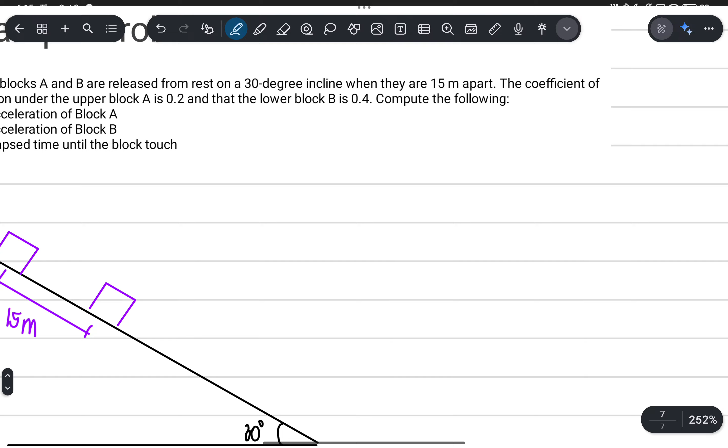Kasi kanina, okay, next. 2 blocks, A and B, are released. Ayoko na, relapse pala, ako rin nag-relapse. And from rest on a 30-degree incline, when they are 15 meters apart, the coefficient of friction under the upper block A, mu A, is 0.2, and then the lower block B, 0.4. Compute the following: acceleration of block A, acceleration of block B, and the elapsed time until the blocks touch.

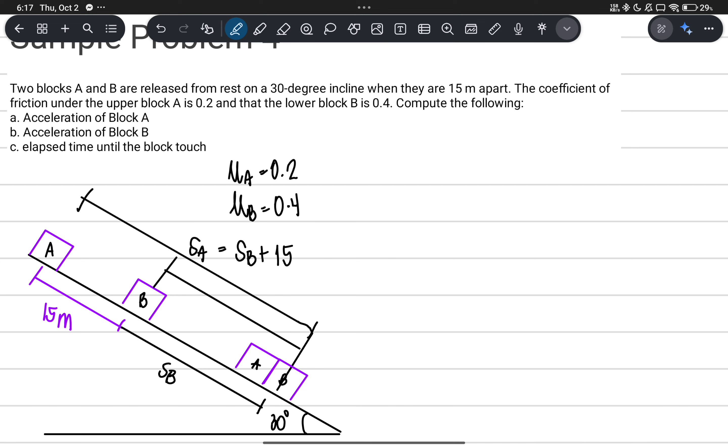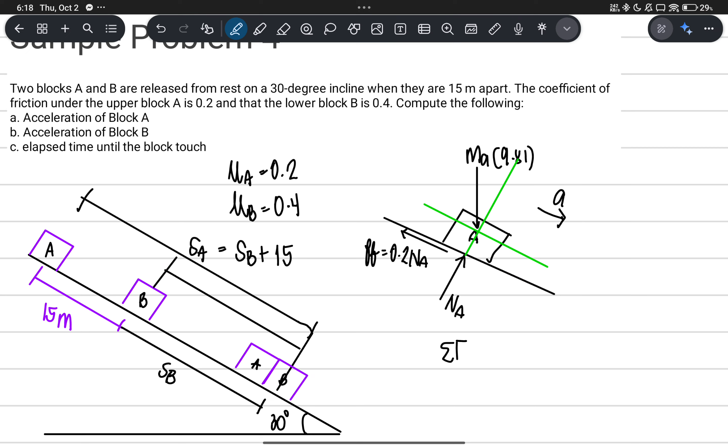So, punta muna tayo kay block A, kasi may acceleration siya. I-drawing natin yung free body diagram. This is block A. Normal force NA, acceleration downward along the incline, weight MA times 9.81 since no mass given, and friction force upward, FF = 0.2 NA. Rotate the axis. Summation of forces along Y prime equals 0: NA minus MA times 9.81 cosine 30 equals 0, therefore NA equals 9.81 MA cosine 30.

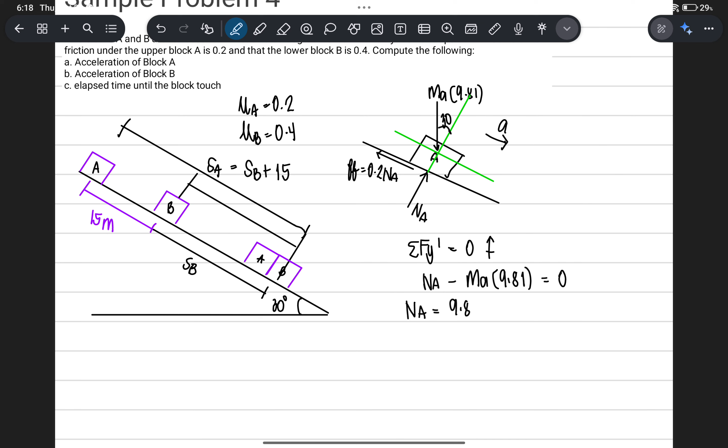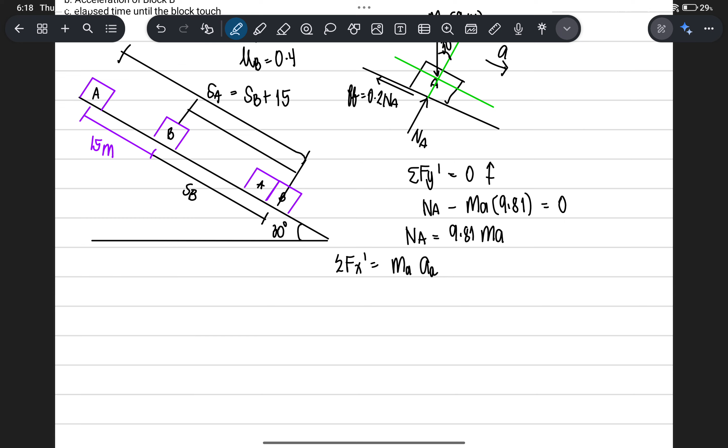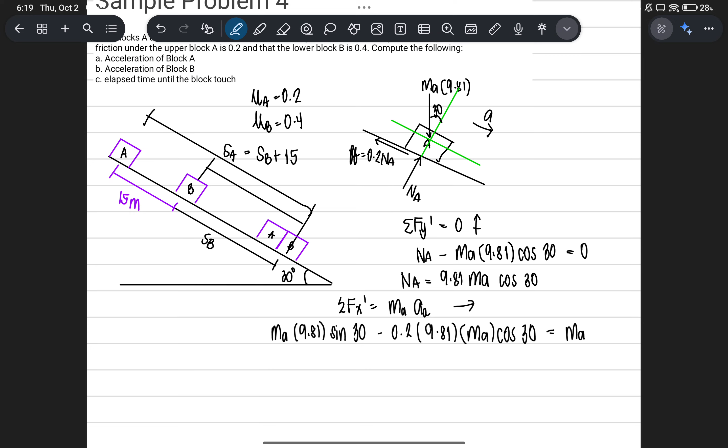Summation of forces along x prime equals MA. MA times 9.81 sine 30 minus 0.2 times 9.81 MA cosine 30 equals MA times acceleration of A. Divide both sides by MA, so MA cancels. Acceleration of A is 3.20.

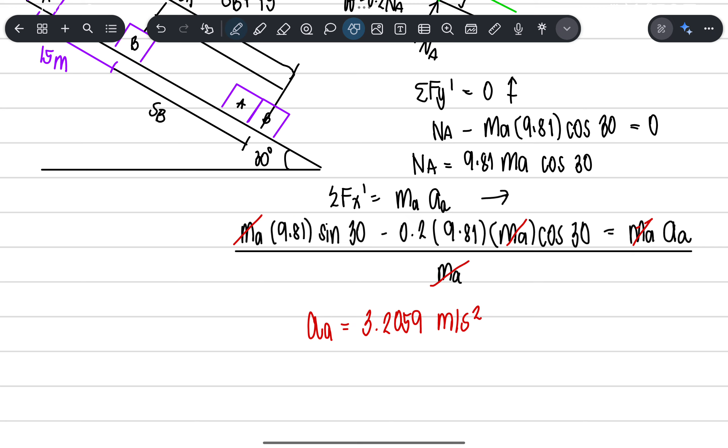Okay, next. Punta naman tayo kay B. Ba't may hintayin niya? 7 tayo. Bakit hanggang alas 8 tayo dito?

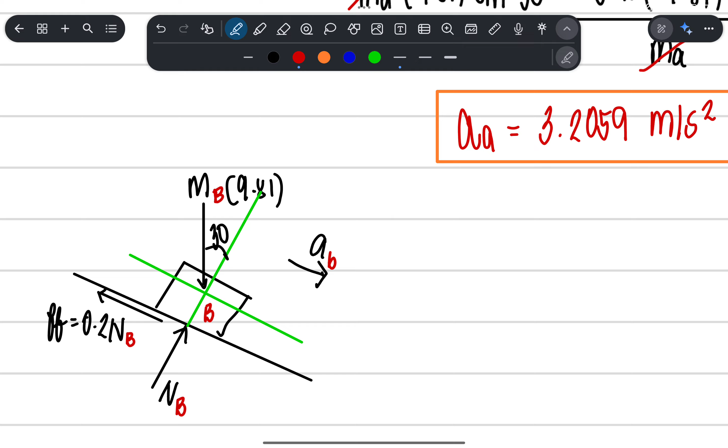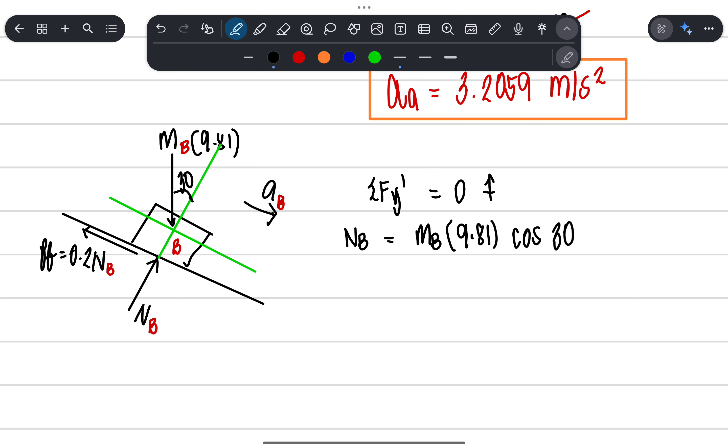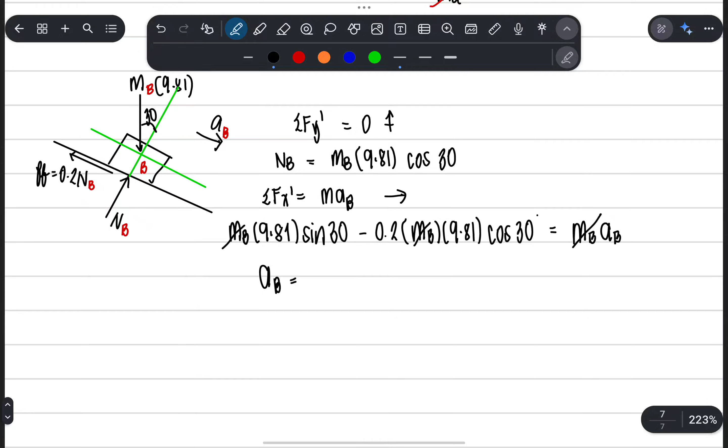Block B. Summation of forces along y prime equals 0: NB equals MB times 9.81 cosine 30 degrees. Summation along x prime: MB times 9.81 sine 30 minus 0.4 times MB times 9.81 cosine 30 equals MB AB. Cancel MB. Acceleration of B is 1.5067.

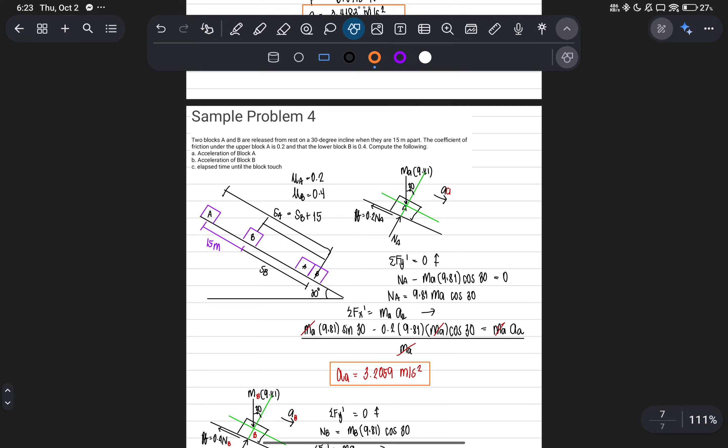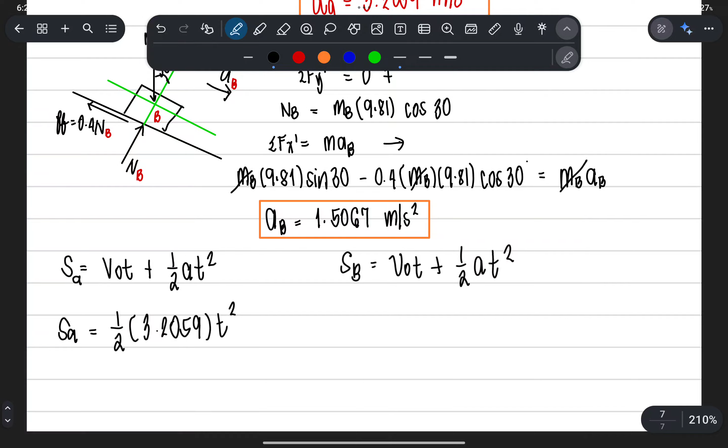Elapsed time: time traveled by block A equals time of block B. Since initial velocity is 0, starting from rest, use S = V0 T + 1/2 A T squared. SA = 1/2 times 3.20 times T squared. SB = 1/2 times 1.5067 T squared. And SA equals 15 plus SB, so substitute.

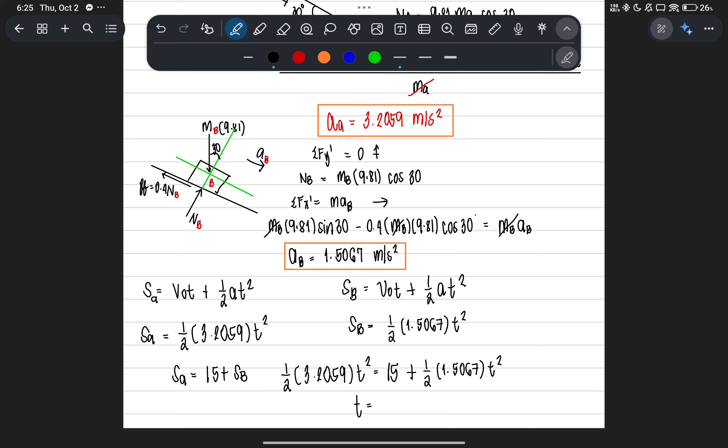Alin yun, saan nanggaling? Ano yung tanong? Huwag nyo akong binabackstab. May tanong pala kayo tapos hindi nyo sinasabi. May hinanakit ka pala, hindi mo sinasabi.